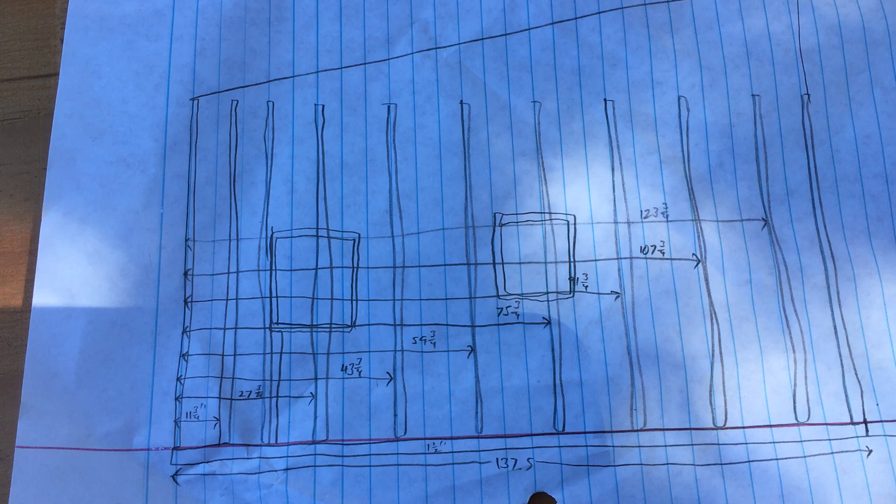Hey everyone. Today I'm going to be showing you a real easy tip for building a rake wall.

So I was looking on the internet and stuff, and there's a bunch of confusing stuff, and it seemed that people made it a little bit more difficult than it needs to be.

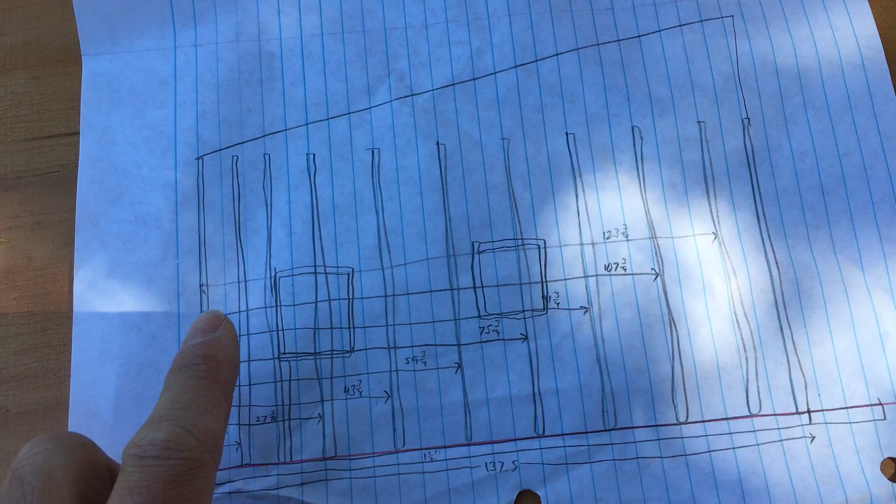So you see my rough drawing here. I got 137.5 inches from one side of my rake wall to the other, and then I wanted it to be 10 feet tall on this side, and 8 feet on this side, just to make things simple. So really all you need to do is figure out each stud and how far it is, depending on if there's a window or whatever, and how long that stud's gonna be, so you can cut them all to fit.

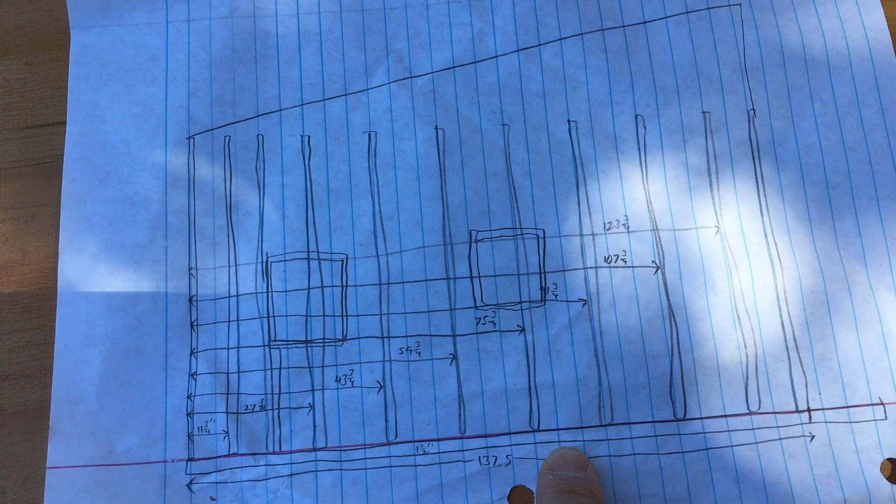Basically all you need to do is get the bottom plate, which is just the length from one end to the other, right? So this is all 8 foot right here, basically. Then this one is 10 foot. So basically it's 137.5 inches by 24 inches, because this stud is 8 foot and this is gonna be 10.

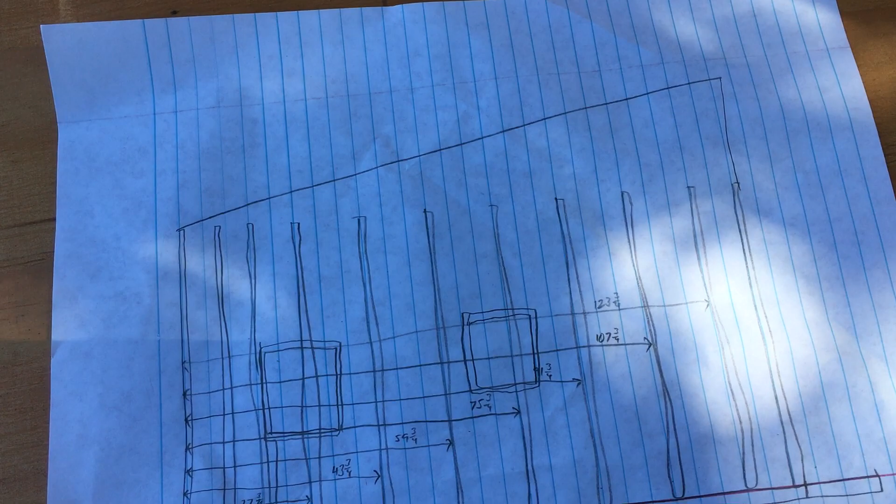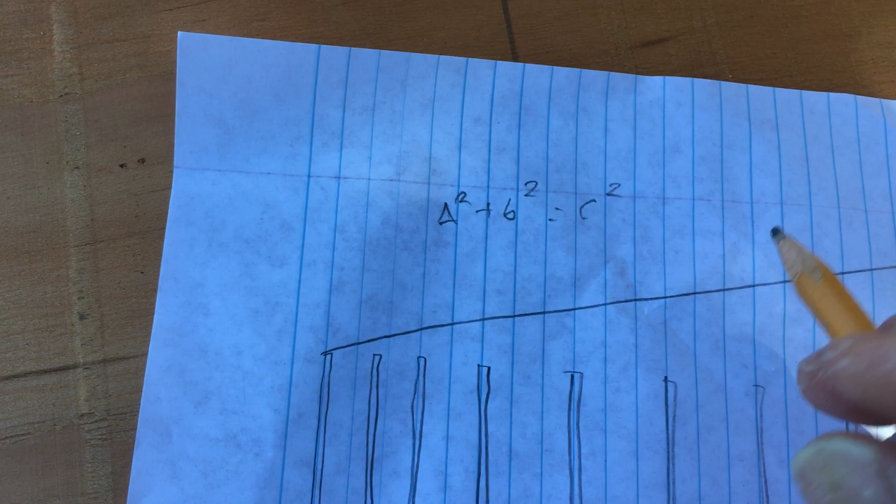So in order to figure that out, you just got to do the Pythagorean theorem real quick. What is it? A squared plus b squared equals c squared, c being the hypotenuse. So you want to find out how long your top plate needs to be.

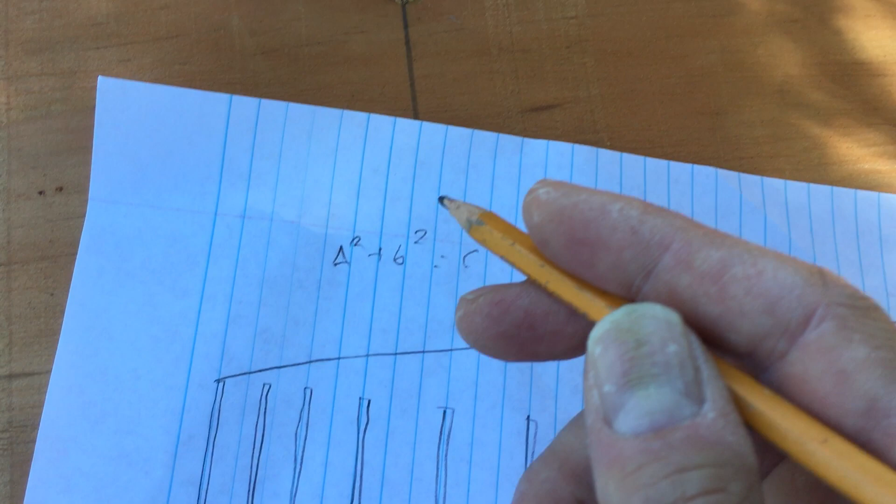So basically you're just going to plug in the 137.5 and then the 24 inches, whatever your run is, and then your rise. So 137.5 squared plus 24, because that's 2 feet, 24 inches squared, is going to give us our top plate.

So unless you can do this in your head, I like to use a calculator. I don't know if you guys can see that. Okay, so anyway, 137.5 squared plus 24 squared is going to equal 19,482.25. So let's just go put that.

What is the square root of that? 19,482.25. So 139 inches, 139.57. We can just round up to 0.58 inches basically. And that's going to give you your top dimensions.

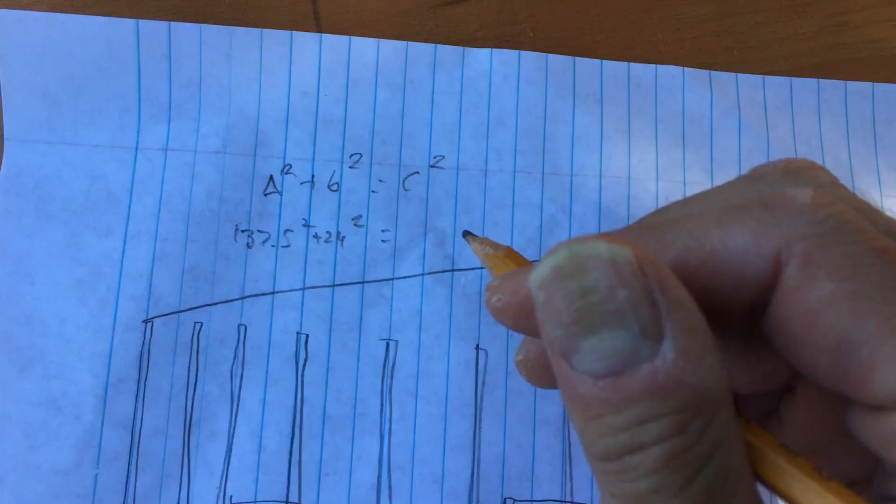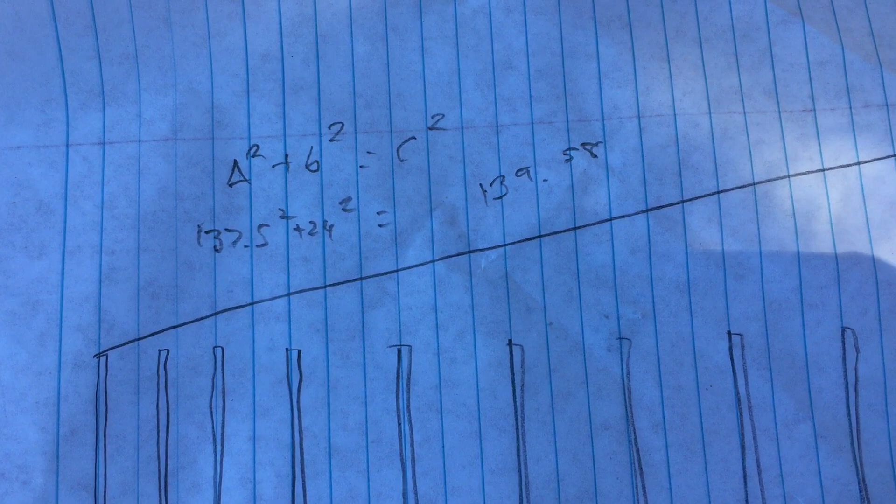So this is going to be, what, 139.58. So what's 0.58? Can we bring that back into inches basically, to make it more simple, like a fraction, 16ths, I don't know. So what would it be? 139 and 58 hundredths basically. That's how you look at that, right? So if you just take 58 over 100, you can turn it into a fraction.

Can we make 100 into 16? I don't know, I'm trying to figure out how to. Well, we can divide it by 2. What's 58? Trying to figure out how to make this into 16ths. Can we take 100 divided by 16? 6.25. So if 100 divided by 16 is 6.25, if we divide 100 by 6.25, we'll get 16ths. Let's take 100 divided by 6.25. I'm doing the math over here. You can see that. Equals, so yes, if we divide both of them by 6.25, we'll get the 16ths.

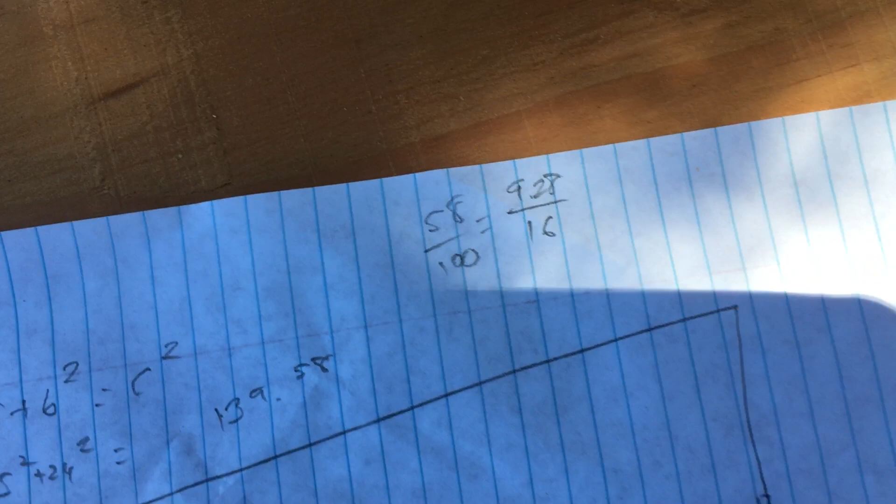So I need to divide 58 by 6.25, right? That gives us 9.28. So that's a little bit easier to understand. Basically 9 and 1/3 16ths, so you could either round that down to 9, just say 9/16. Okay, so basically 139 and 5/8, and 58 hundredths is the same as 9/16.

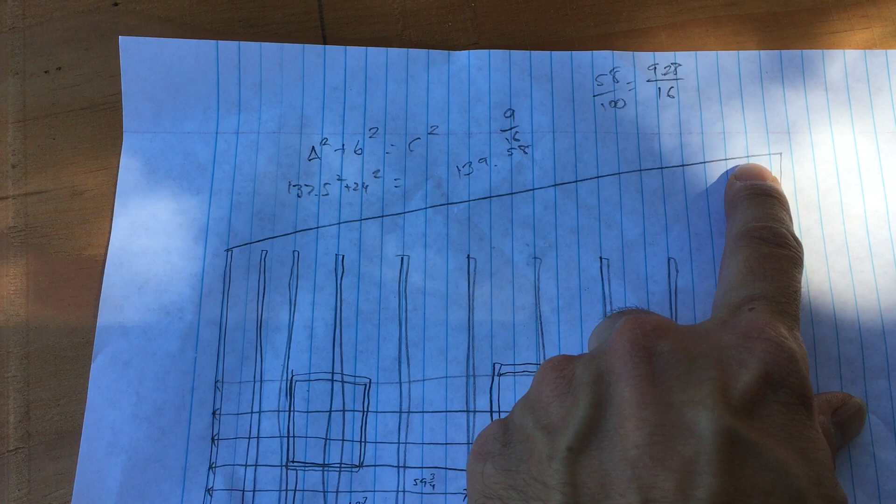So that's all you really need to do to find this top rail. And then to do the rake wall, you don't need to measure each stud and figure out how long each stud is going to be. All you need is the first wall.

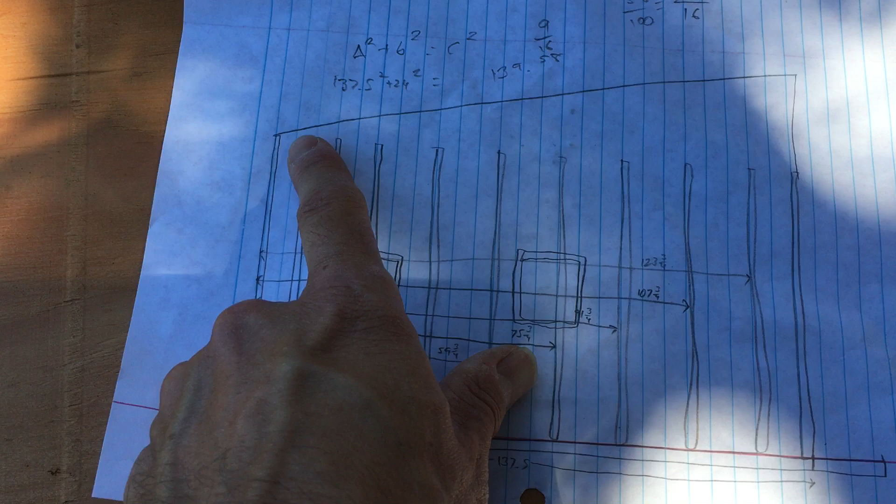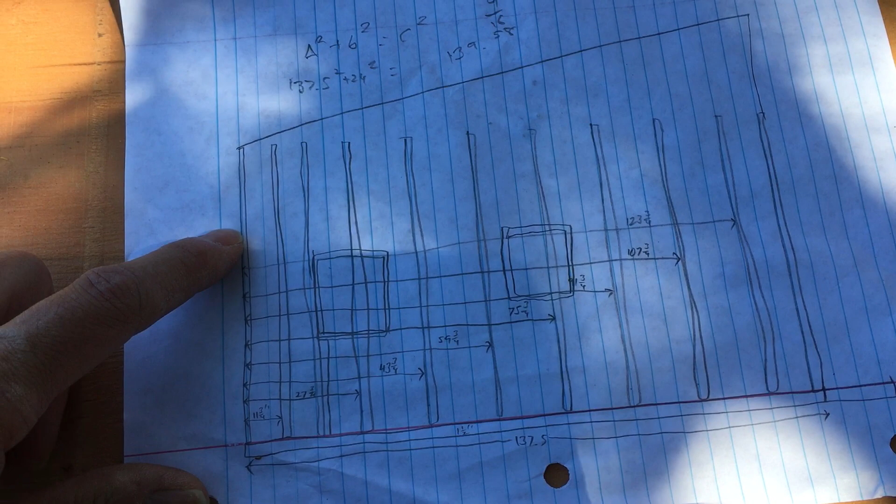If you want it to be 8 feet, the top rail and the bottom rail are both 1.5 inches, so you're going to want to subtract 3 inches, because 1.5 inch plus 1.5 inches is 3 inches, to make the wall 8 foot exactly. That's what I wanted anyway. And then the same over here: if you want this to be 10 feet, you have to take away 3 inches from your stud. So obviously this is 8 times 12, 80.

8 times 12 is 96. 96 minus 3, 93 inches for your stud over here.

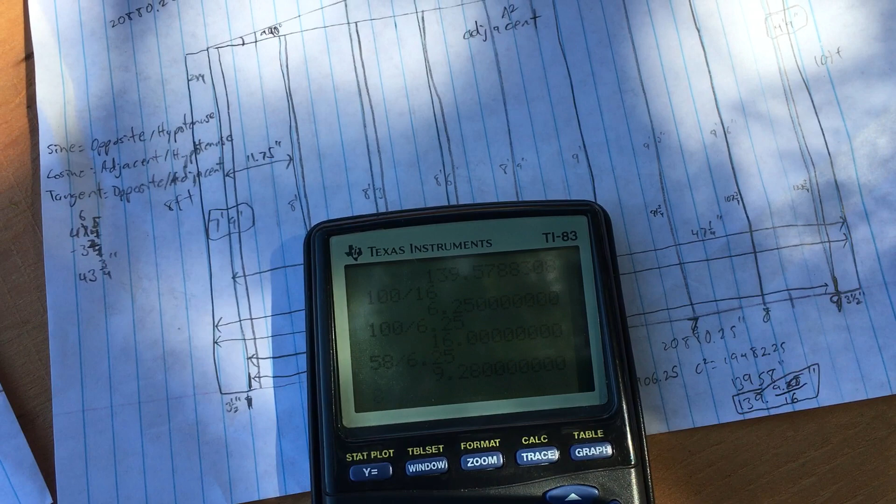Man, I can't like think and do a video at the same time. Just making sure I get that 8 times 12. I'm really not a moron.

Okay, 96, yeah, okay. And then the same with your 10 footer, just 10 times 12 is 120 inches. I know that one. Take away 3 inches is 117 inches, right? And then so this is just my example. This is what I'm doing.

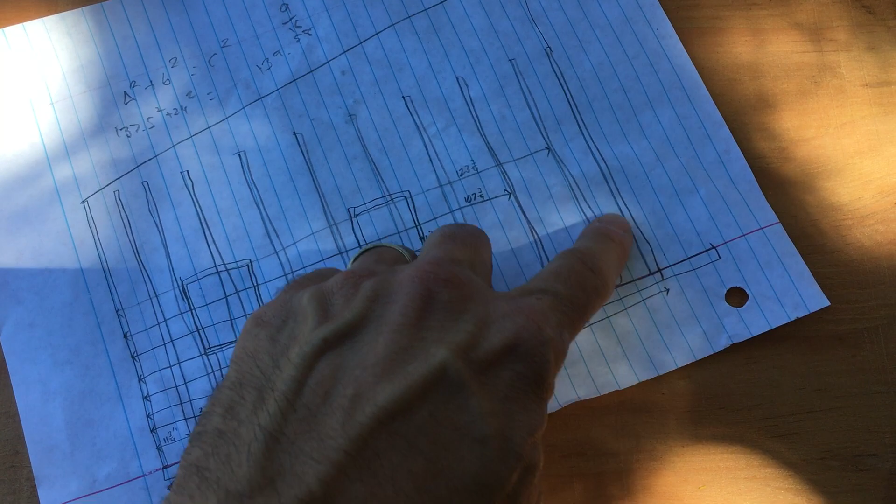So then you just basically do these sides, and then the angle you're gonna have up here, let's see, is there another complicated formula for the angle? I think there is. I think it was something like sine, and then the sine equals basically the adjacent by the opposite, something like that, or the cosine.

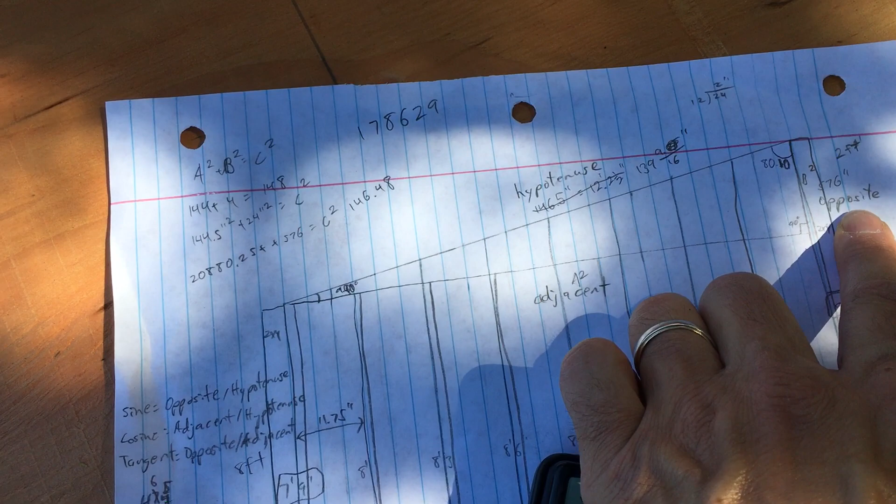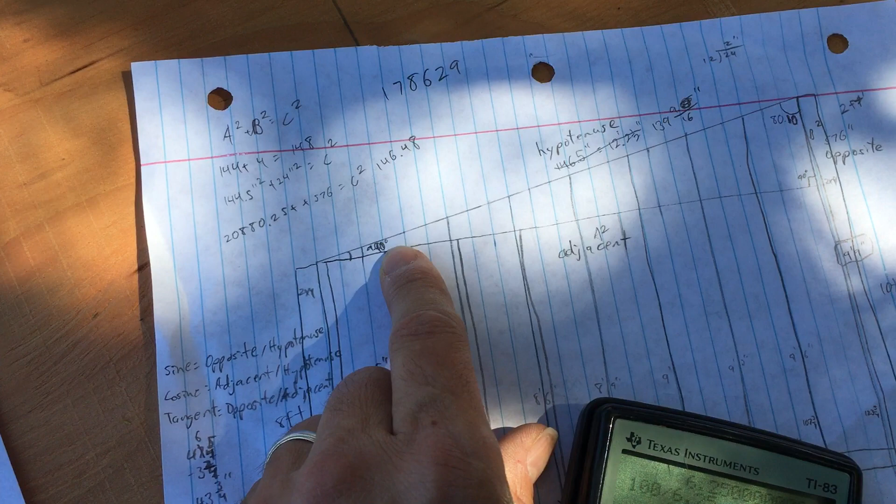Anyway, you can find an angle if you know the length of any two sides. There's these different things here, sine, cosine, and tangent, if you want to find the angles. So if you want to find this angle, then you're gonna want to find the adjacent, and then you could use the hypotenuse or the opposite, basically. So it depends on which one you want to use and what information you have.

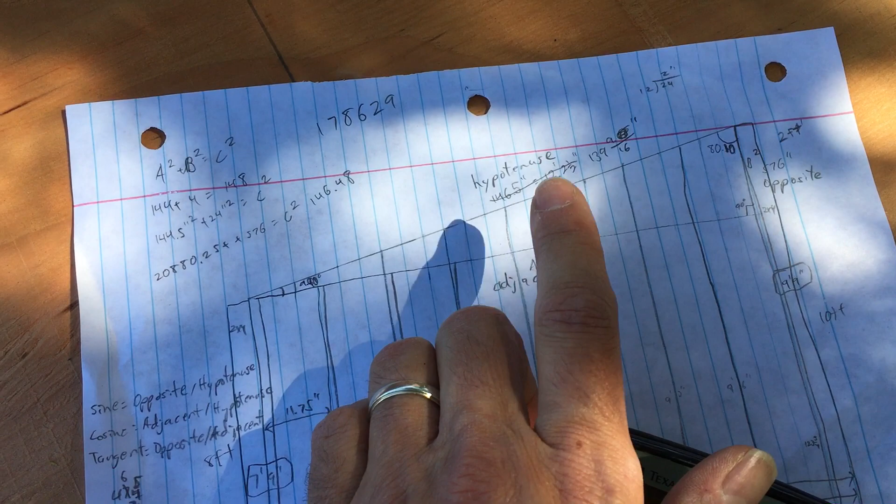Well, we have the information. We have this one. We know it's 100. Sorry, if we go down, we know it's 137.5. So we have this. We have the hypotenuse because we figured it out already. And then we know what this is, 24 inches.

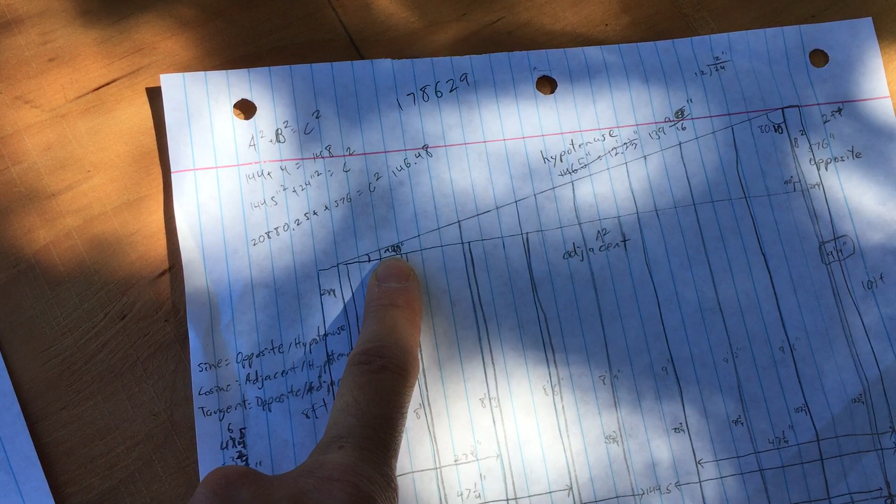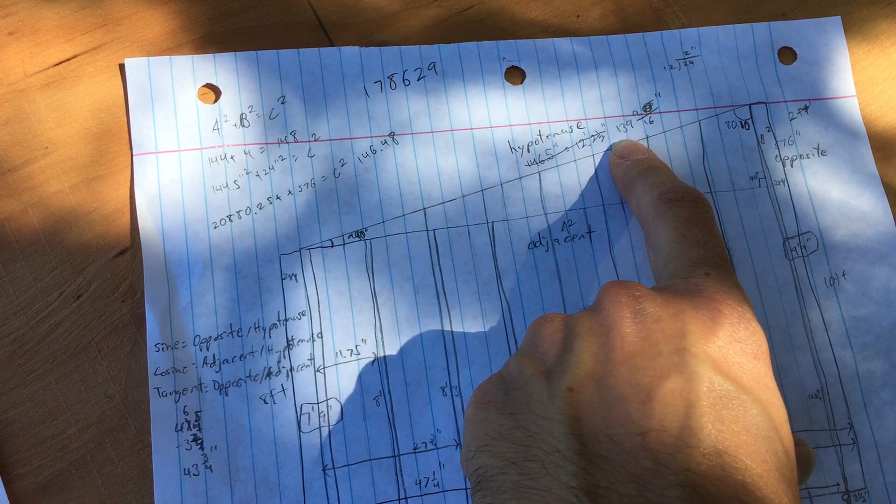So basically, if you want to figure this one, it's the opposite side and the hypotenuse. So you could say 24 inches divided by 139 and 9/16 inches, and then that'll give you the sine. So if you have a calculator like this, it has cosine, sine, tangent. This is a Texas Instruments calculator, very helpful.

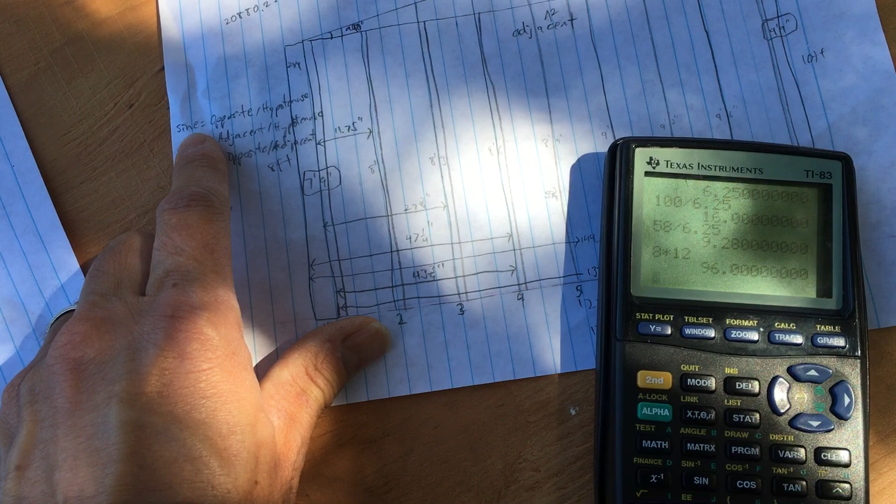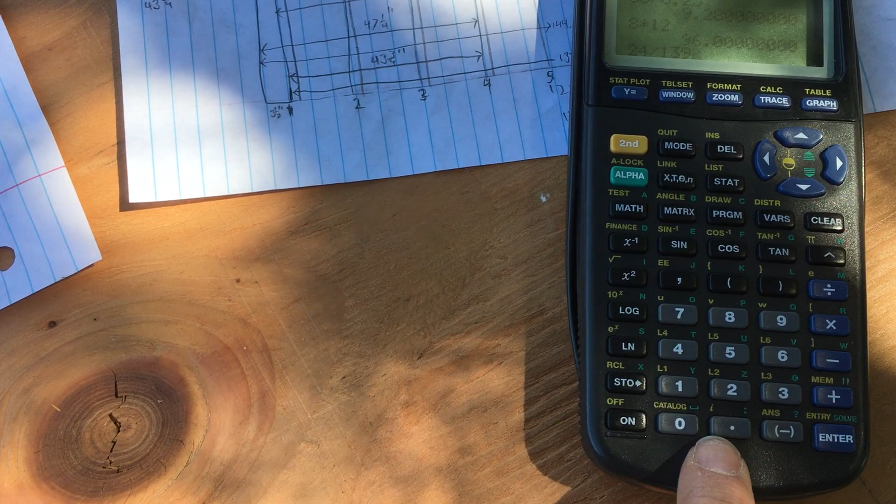So basically, if you want to find the angle, you punch the information in using this. So if I want to find sine, I go opposite. So let's just do it: 24 inches divided by the hypotenuse, which was 139.58, equals 0.1719.

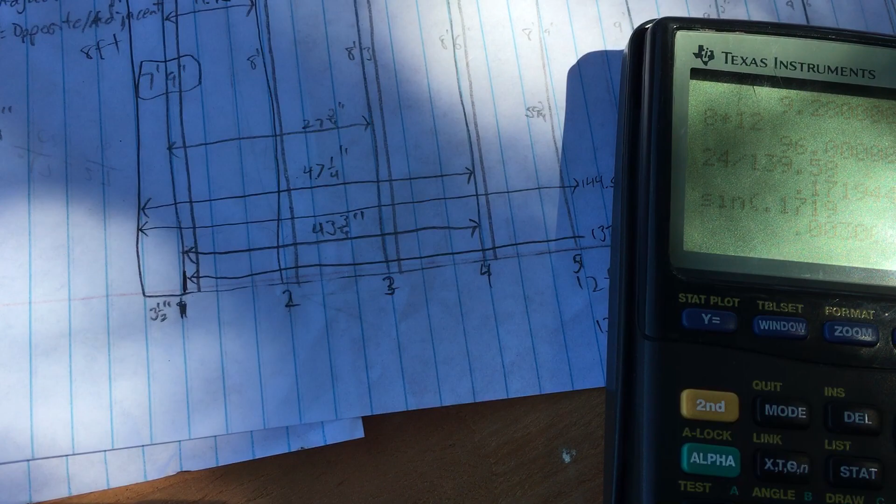Anyway, so we used the opposite and we divided it by the hypotenuse. So you do sine of 0.1719, and it equals, did I do that right? 0.003 degrees. Shoot, I think I did that wrong. I can't remember which one I did, but maybe I used the cosine. I'm sorry, guys. So the cosine would be the adjacent divided by the hypotenuse.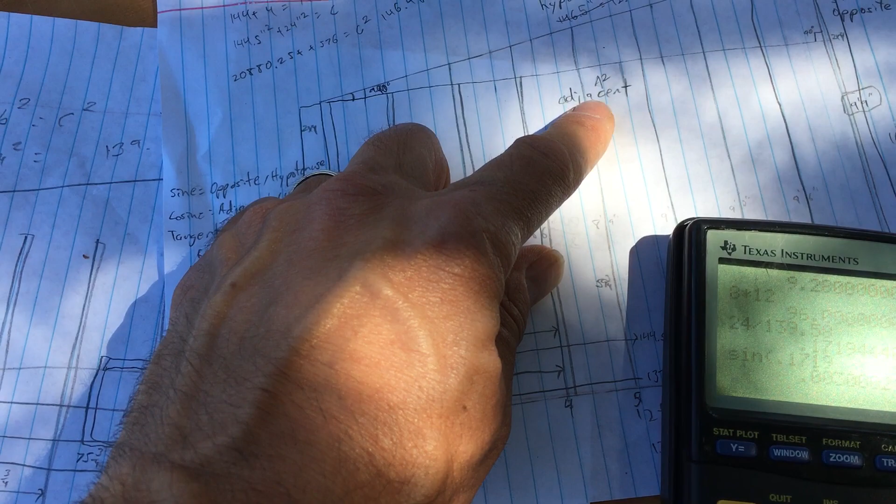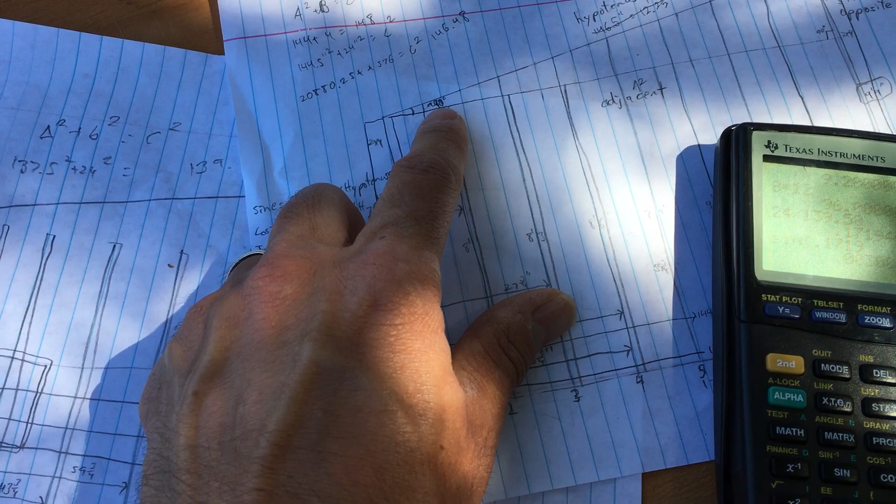So let's try this one. That doesn't look like a real angle. I got like 9.9 degrees, and I wanted to show you guys that I actually got that. So let me try again here, because that doesn't look right. So we'll try the cosine. Maybe that's the one I used. So adjacent divided by the hypotenuse.

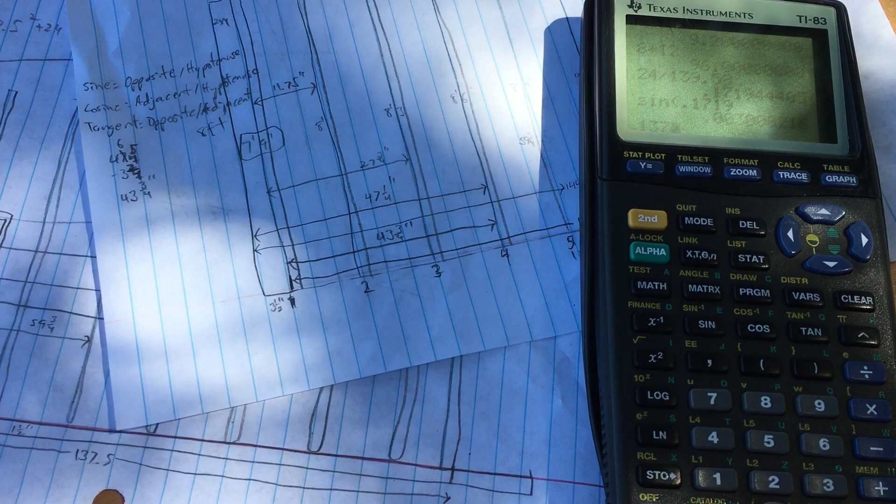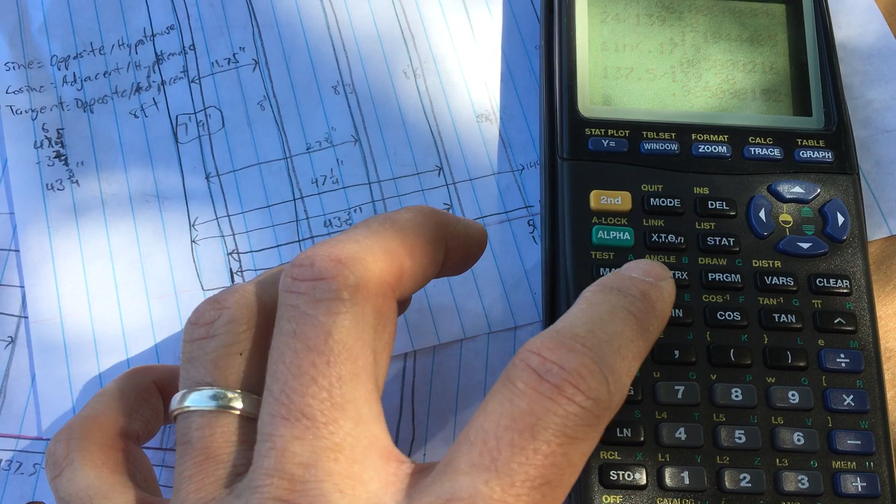So the adjacent side was 137.5, divided by the hypotenuse, 139.58, equals 0.98. Okay, and then the cosine of 0.9850. Oops, shoot. Oh, maybe that's what I did wrong. I did just regular sine. Hold on. I think I was supposed to do inverse sine. Oops.

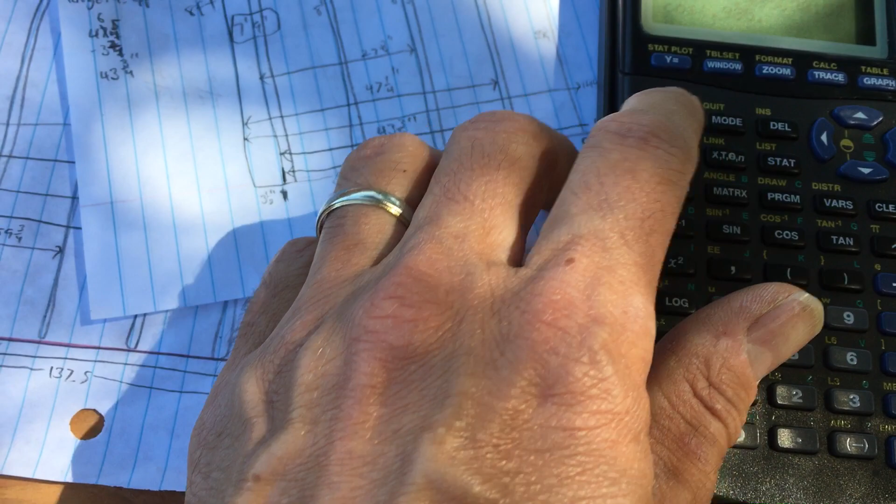Sine of 0.1719. Okay, yeah. So when you do the sine, make sure it's a sine, because there's just sine right here, cosine, tangent, but then there's negative,

I'm sorry, I can't think or speak this morning.

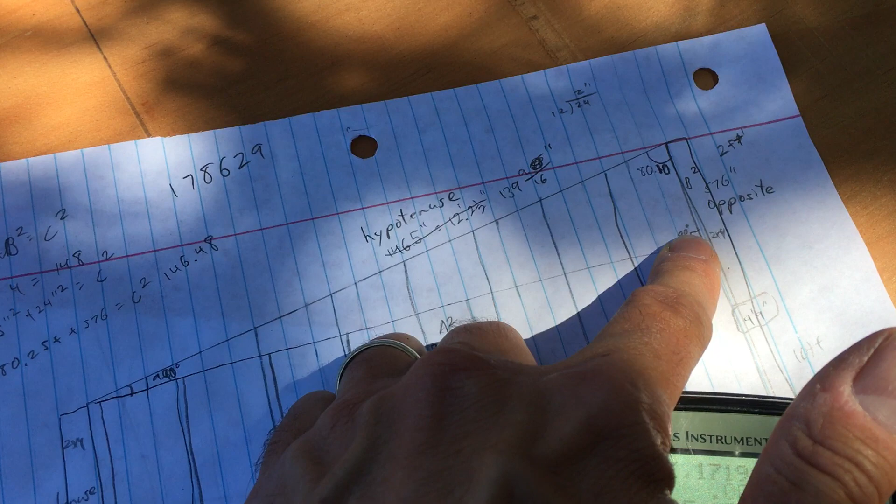At any rate, you get your angle right here. So I just rounded up to 9.9. This one's 80.10. This one's 90, right? Because it's a triangle at 180. Wait, that's not right. 90 and 90, yes, is 180.

Man, I can't think this morning.

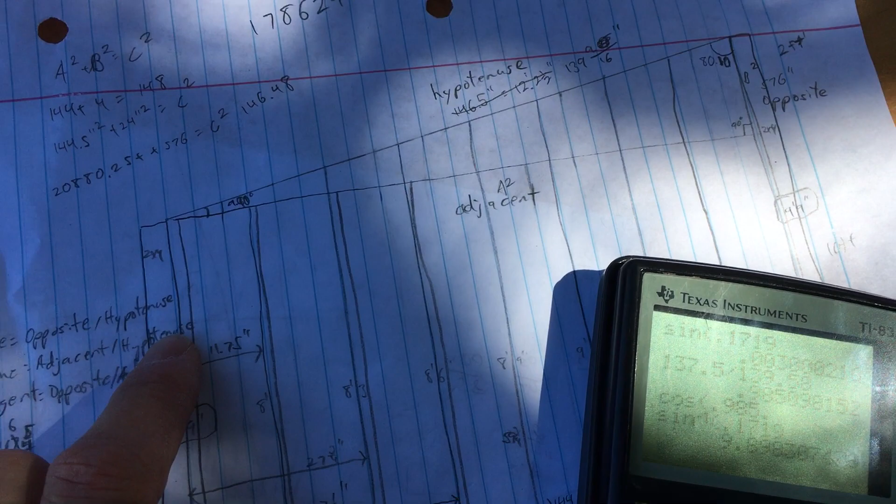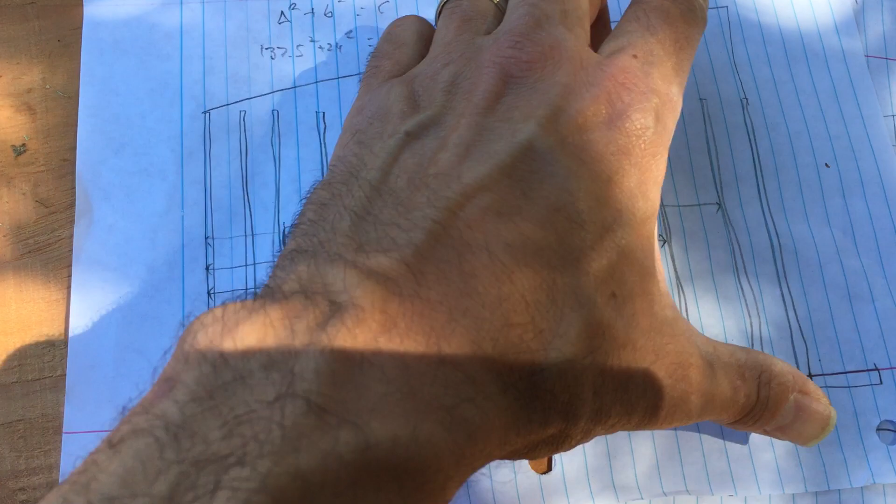Okay, so that's how you get the angle. Okay, sorry. It's really not as hard as I made it look with the right calculator, if you push the right buttons. Okay, so now we know our angle, right? So all you have to do, you put in this stud, you do the bottom plate, you cut your top plate to that length, and you have this stud, and then you tack these together, and then you don't have to guess how long this stud is gonna be, how long do I have to make this one, and I have to have it all measured out before I do it.

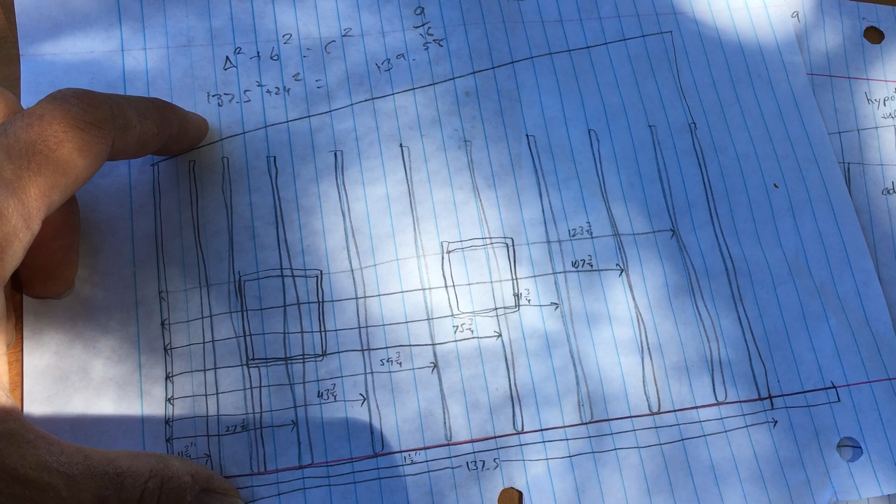No, just take your stud after you have your frame here. Take your stud and basically you put it underneath this frame, and then just draw a line. Okay, the angle and everything will be in there. So depending on where you put your studs down here for windows and however you want to work it out for sheeting, and you're trying to do 16 or 24 on center, whatever, none of that really matters.

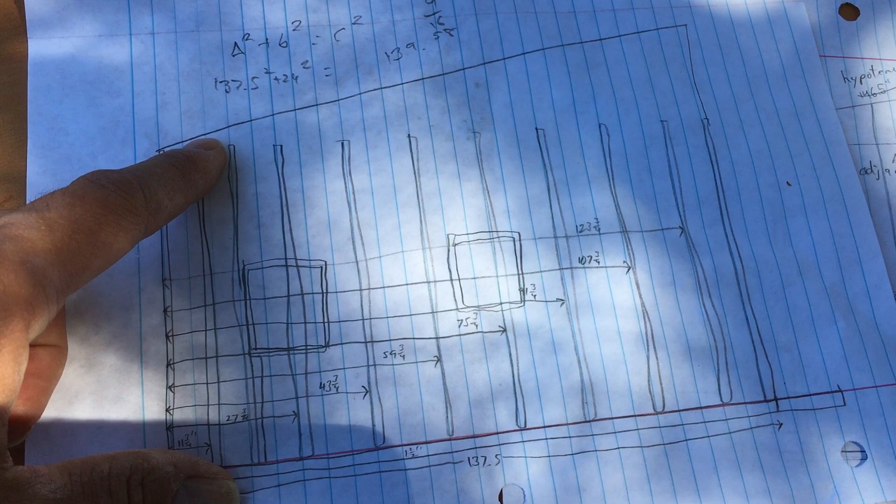You just lay out your stud, and it's going to be longer than from top to bottom here, right? And then you just basically take the angle of it, if you know where it is down here and where you want it up here, this will be square, and this will be the same distance from here to here. So then you just put your stud down and draw with a pencil where you need it cut. Then take the stud back out of there, cut it on your miter saw. It's going to be at a little bit of an angle, and you've got it.

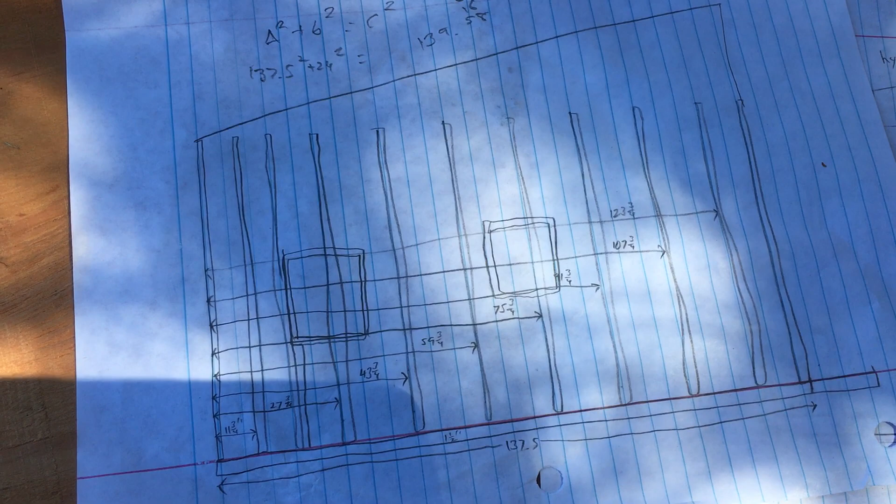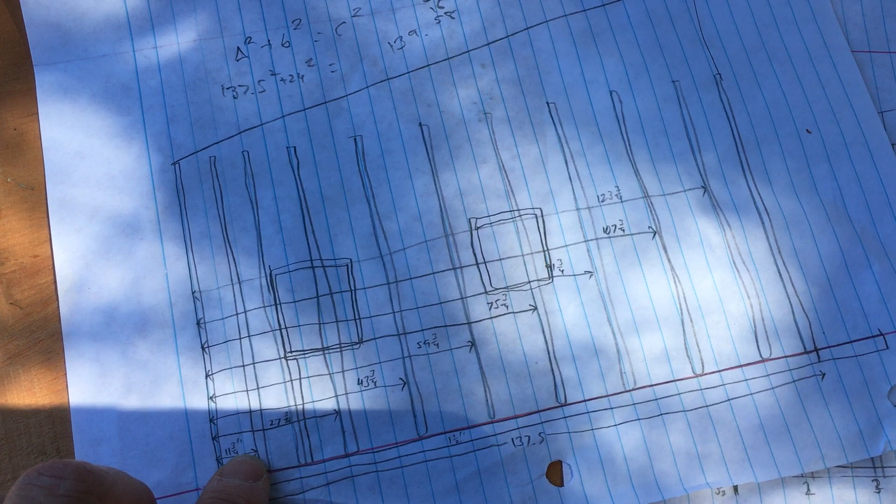So you don't have to figure out all these measurements in here before you do the rake wall. And that's what had my mind spinning, like, how much do I need to add to each one? And since these aren't exactly 16 on center, I made this one 11 because I'm going to have another wall over here. So I want it from the 3.5 more inches, I want it to be 16 basically, with the 3.5 over here. So I wanted it to land and start 16. You know what I'm saying?

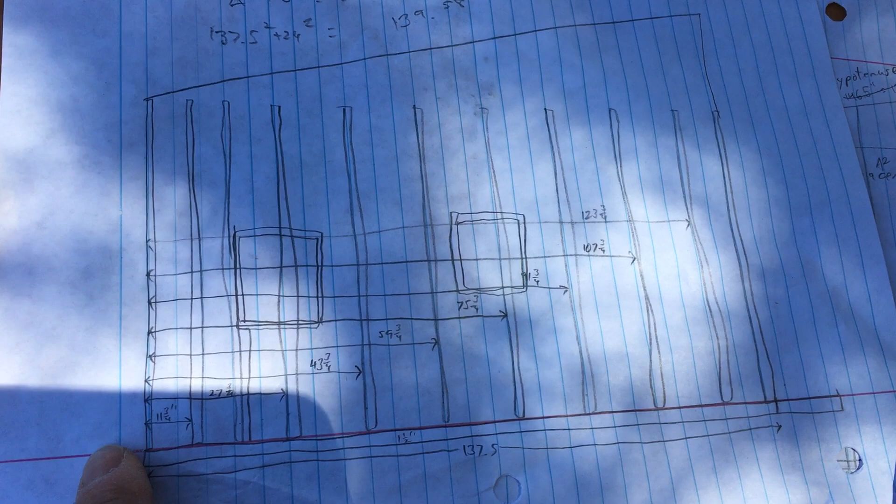And then I try to factor in sheets of OSB or whatever you want to put on your side, but they're usually 4x8, right? So I tried to factor those in too. But I'm gonna have another wall over here and another wall over here. So I wanted to have the plywood or the OSB fit over this to tie the walls in together more. So that means I started my stud at 11 3/4, with the 3.5 inches for the other wall. So that's why I did that. It made sense in my head, and it's just a treehouse.

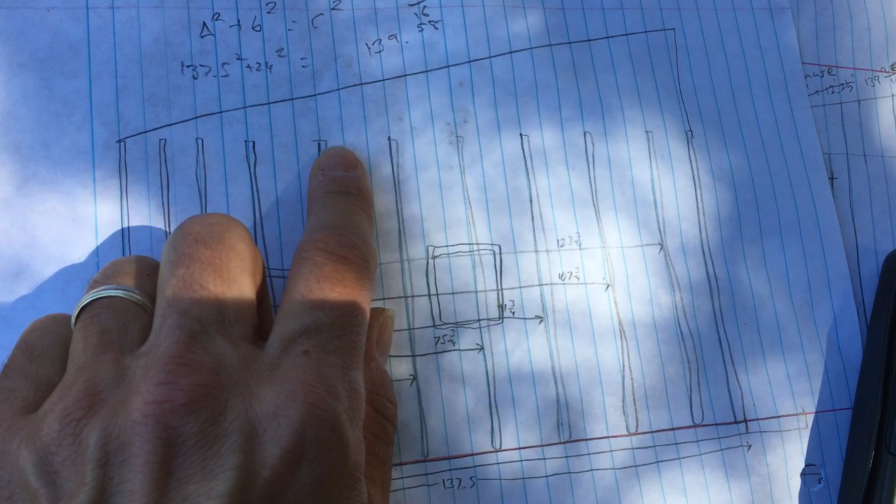So anyway, thanks for watching, folks. I hope that helped, that you don't have to figure out all these other stud lengths before you do your rake wall. Just do your frame. Just figure out the top plate, your two sides, and the bottom plate, and then use the math. Definitely use a calculator unless you're a stinking genius to figure all that out. But I hope that helps. That'll give you the angle, and then you can do the angle.

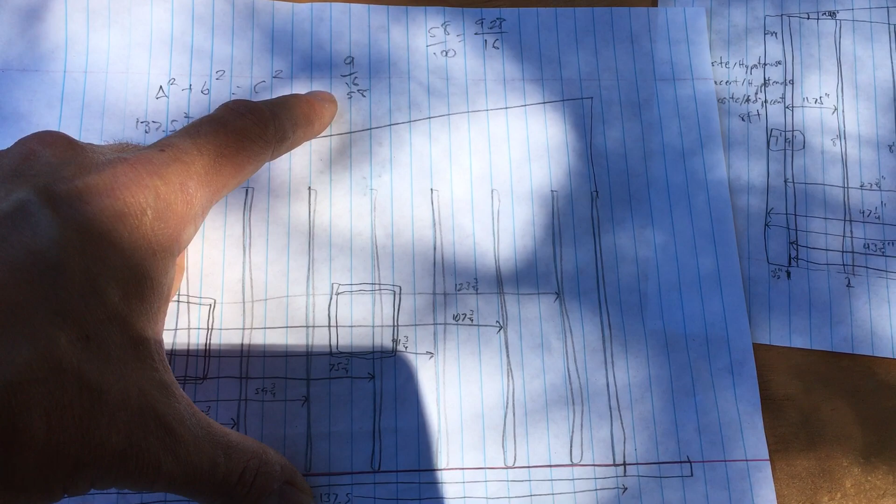You can either use one of these if you want to do the angles, or I think on your miter saw you can figure out the angles. So, or just, yeah, just put the studs under there, draw with a pencil, then pull the stud back out, cut it to length, cut it to angle, and you're good to go. So I hope that helped everyone out there. I wish I would have seen a video like this when I was trying to do this, because I wasted like 2 days trying to figure stuff out.